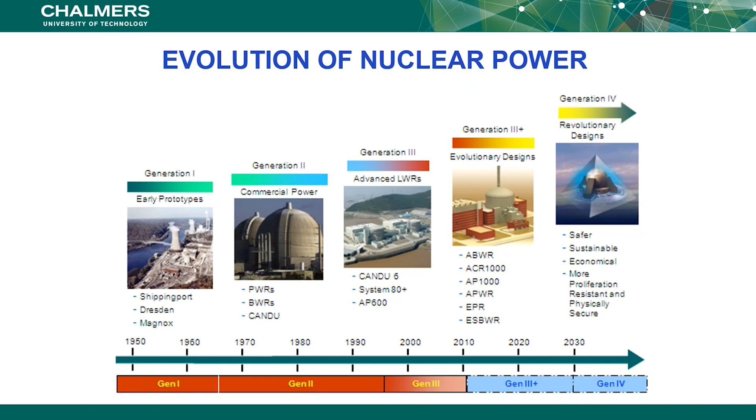With this being said, let's dive a little bit further. Next slide, please. So what are the common designs which today we can say we have in the world?

Here you have a table, taken from a review paper. It shows not only what type of reactors we have, but what type of material, the fuel, which one it is, what is the moderator, what is the coolant. And of course, it's very interesting to know the cladding and some operating parameters.

So we can talk about gas-cooled reactors, pressurized water reactors, boiling water reactors, pressurized heavy water reactors, advanced gas-cooled reactors, and high power channel type reactors. The fuel is mostly uranium oxide, but we also have mixed oxide fuel, that means uranium oxide and plutonium oxide mixed, so-called MOX.

When we talk about the moderator material, you can see that it varies already today. We can have graphite, but also water, so-called light water, and heavy water when it comes to the pressurized heavy water reactors.

When it comes to the primary coolant material, that also can be different, but in some cases the moderator and the primary coolant material are the same thing. So I'm speaking mostly about the water-cooled reactors, which is basically one of the most used types of reactors in the world right now.

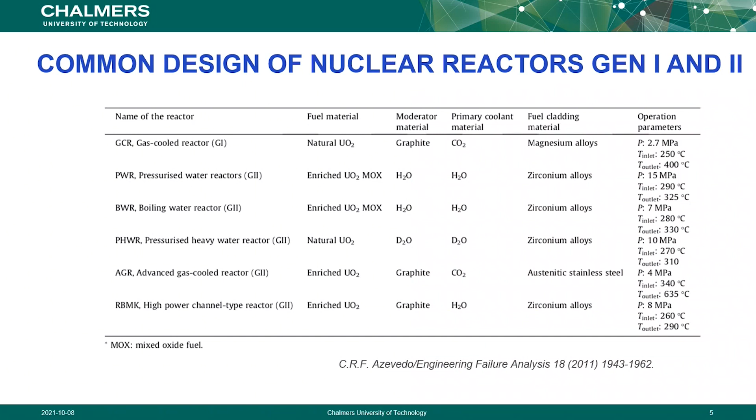So this is a very important real life case of why the materials used in the reactor are very important. And the design of the reactor is very good to know, because then thinking about what type of chemistry can happen, some materials, when they react with each other and have a proper environment to react, can play a very important role in safety.

Let's go to the next slide. Then when we are talking about the design for the Generation 4 systems, and also the 3+ systems, basically we are talking about different types of nuclear reactors. So we have the gas-cooled fast reactors, lead-cooled fast reactors, molten salt fast reactors, molten salt reactors, advanced high-temperature reactors.

You can see also that the spectrum is sometimes fast spectrum, other times thermal spectrum, so you have it in the next column there. Then we talk about sodium-cooled fast reactors, supercritical water-cooled reactors, and very high temperature gas reactors.

And then you see that the neutron spectrum differs very much, and this is basically because of the type of fuel you have in the reactor. So if you look a little at that, you see that the fuel will change. It's not only uranium oxide or MOX fuel, but there are other types of fuel.

This is because this type of fuel is already recycled, and is basically now probably at the 4th or 5th cycle in a reactor after their first use. The coolants also are changing. The reason is that having a fast reactor spectrum, you have to look at what you use in order not to thermalize the neutrons, not to stop their speed.

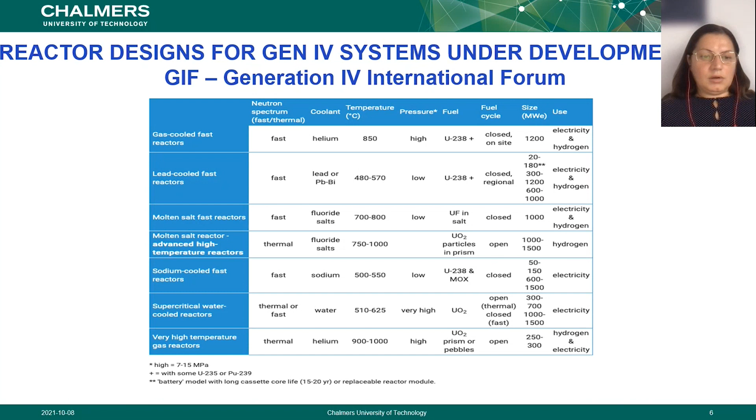Of course, there are much more reasons, and I don't have today this in mind to talk about. But anyway, keep in mind that all these reactors we have here, at least half of them are foreseen to be small modular reactors. So not all of them are fitting for that, but some of them are. And here I'm talking about mostly the salt cooled reactors or metallic cooled reactors.

So how about nuclear safety? What are the primers of the nuclear safety? Well, we talk about hazards. What hazards do we have? What are the most important? Fission products are highly radioactive, and some of them are also toxic by themselves. They don't have to be necessarily radioactive.

What is the aggravating factor when we talk about nuclear safety? Well, a nuclear fuel can never completely be shut down. So we have the decaying heat, we still have reactions which are ongoing, chemical reactions, but also due to the heat, you can have all kinds of different metallic phases which are still modifying.

And what are the objectives when we talk about nuclear safety? Of course, the objective is to prevent the release of radioactivity into the environment, and of course, interaction with human beings. So for this, there are two main safety pillars we can talk about. There are much more, of course, but these are the main safety pillars.

One is called defense in depth. That means there are multiple independent physical barriers. And which are these physical barriers? Well, first of all is the fuel, and the fuel pin, and the vessel of the reactor, and then we have the containment of the reactor. So all the components of a nuclear reactor are built with safety in mind. So they have to withstand by themselves stress.

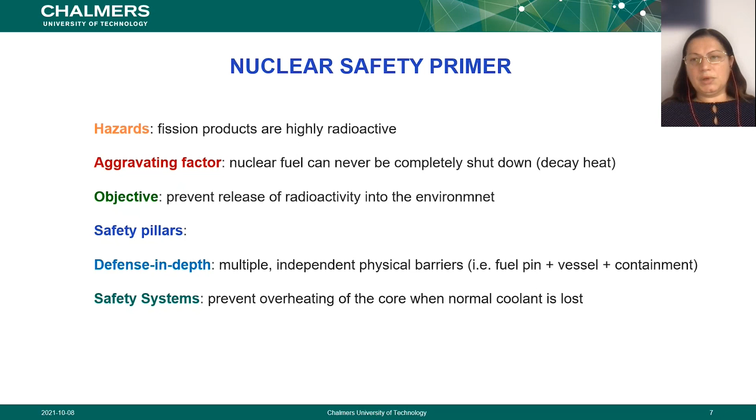This is a lesson learned from past happenings and also from tests which were made before the reactors were even built. Let's go to the next slide.

Thank you very much. So the physical barriers - as I said, it's a very childish picture, but probably quite easy to understand. We have the first physical barrier, which is the fuel. You can see the fuel pellets are stacked and encapsulated together, and you have the cladding material around them.

So basically here is the second barrier, and all these are stacked together and put in the fuel assembly, which is the third barrier. The fuel assembly is in the core, where here in the reactor you have this small red dot. It's put in the vessel, which protects everything. So this is another barrier.

And then you have the reactor containment. Here you have a better picture where you can see in 3D almost how the interior of a containment looks and where the core is placed. The core is here, the red part. So you can see how many systems you have around in order to prevent any escape of radionuclides which can possibly escape by mistake from the core of the reactor.

And then, of course, all around there are other systems which can act if the containment is still not damaged. All the other systems here are made with the thought that they should be independent and should not come in contact with anything inside. So we have these heat exchangers here - basically the systems in the reactor shouldn't come in contact with anything that goes into steam or to the turbine. So there are a lot of redundancy systems, and even these systems still have additional redundancy.

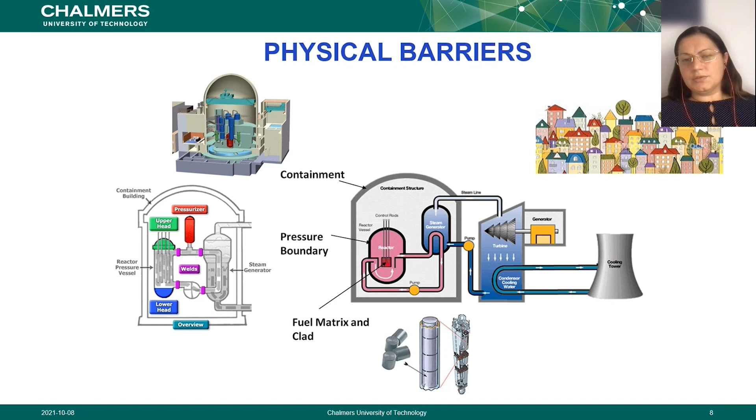Let's go please to the next slide. If you think a little bit about how things are handled today at nuclear power plants, and how safety applies all the way until the fuel can be taken down to the final repository - here I have the example of Sweden.

You can see that you have the fuel, the cladding and the fuel, the reactors here, several power plants where you have different types of reactors. For instance, in Oskarshamn you have boiling water reactors, while at Ringhals some of them are pressure water reactors, and here we have another boiling water reactor. So the type of reactor can vary.

What is happening with the fuel? Basically, after you use the fuel in one cycle or several cycles, you take it out and keep it in some pools which are very close here on the site. You have the pools where you can keep this fuel up to 3 years.

And then you have to transport the fuel to an interim space. In Sweden, the interim space is called Clab, and it looks like this. There are some swimming pools quite deep where you can store the used nuclear fuel in capsules. It will stay here up to 40 years until it's cooled down enough that you can actually put it in the capsule.

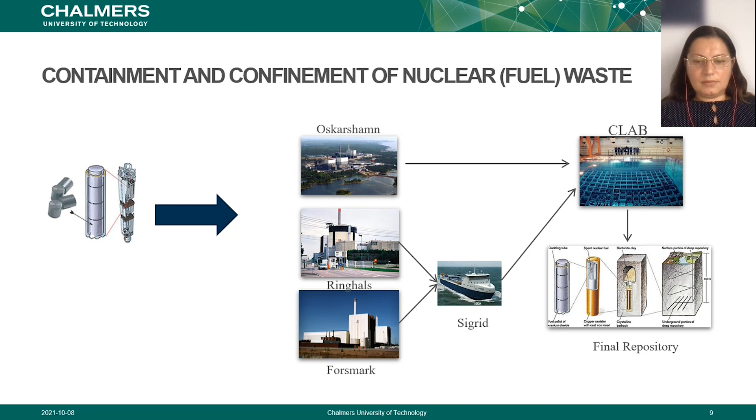So now we are going to talk a little bit more about the fuel matrix and the cladding, because this is a very important part of the safety. As I said, this safety goes from the beginning to the end, and it's depending on the materials which are present in the fuel matrix and also the cladding.

Why do I say matrix? Well, because you have different types of compositions and chemistries in a fuel, and you will see that it can be quite complicated chemistry, and also cladding can be quite different. So let's go and see the safety.

When we talk about nuclear fuels, there are quite many types of nuclear fuels we can talk about, and they can be either commercially available already, or they are under evaluation, some of them, or they're under research.

And the most used right now in the world are oxides, and you can see that you have the uranium oxide or MOX fuel. Then we have the metallic fuels, which were used in the Magnox reactors a while ago. Carbides, which are still under evaluation and research right now.

We have nitrides, where also, actually in my group, we are making quite a bit of research on the nitrides right now. So it's one of the fuels which is already under evaluation, one step further from the research area. Then we have the metal alloys. We have the inert matrix fuels, and these inert matrix fuels are basically in the ceramic forms.

And then we have a plethora of other types of nuclear fuels which are under research, and some of them are quite advanced. If you look at this TRISO, for example, which is basically tristructural isotopic fuel, it looks a little bit like a beautiful golf ball. This is actually quite advanced. It's one of the most promising nuclear fuels because it's extremely good when it comes to safety.

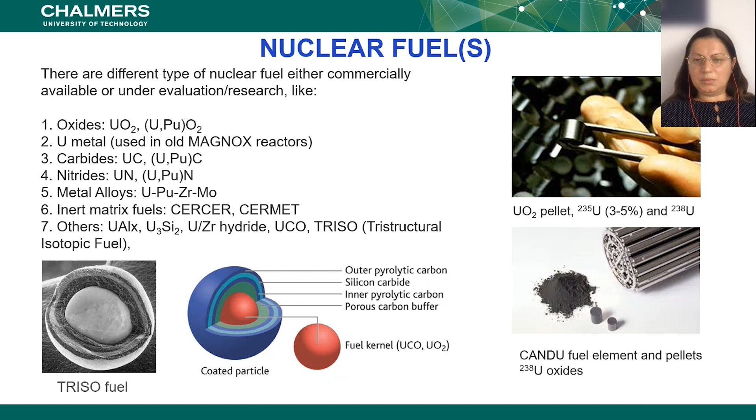Before that, we are going to look a little bit at the cladding materials. And as I told you before, cladding materials are very important for safety. And this is why: first of all, it's because of the materials they are made. They can serve as protecting the fuel, but they can also, in proper environment, play the role of a catalyst. You know very well that catalysts can speed up reactions, and then you can have chemical reactions which are not necessarily desired in a nuclear reactor, which can lead to severe accidents in the end.

So we have the well-known zircaloy, and you have it, it's this quite shiny, beautiful color. Then we have stainless steels, depending on what type of reactor you are using. But here we can look at the Kanthal type of FeCrAl material.

And then we have all kinds of aluminum alloys for research and test reactors. We have all kinds of refractory alloys, which are withstanding very high temperatures. So these are mostly used for gas type of reactors, which have much higher temperatures for functioning than other reactors.

And then we have also some research for the ceramic matrix composites. There are quite many, but none of them is right now desired for operation. But this has been also a very good proposal, because when you have different layers of composites, they might withstand pressure and all kind of deformation maybe better than a metal.

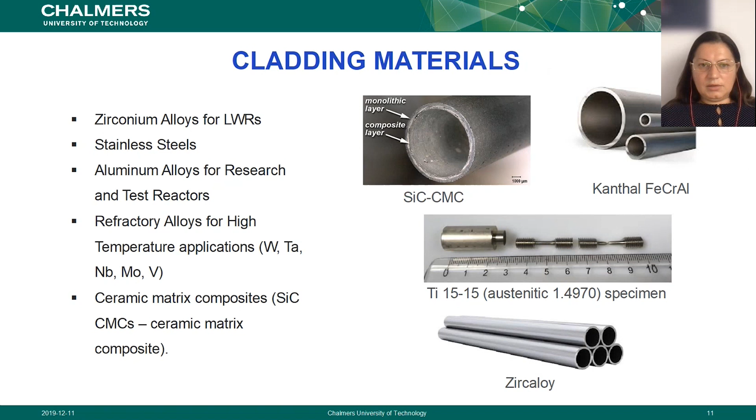When we talk about the coolants, here we have also a very important part, because a coolant can play a very significant role as the barrier, which is almost the ultimate barrier before everything goes out from the containment of a nuclear reactor. So they have to both cool, and most of them also have the role of retaining some of the fission products which are produced in the nuclear fuel.

Historically, we have very interesting coolants, and you can see that there have been a lot of liquid metals which have been used, and we have had mercury, sodium, potassium, lithium, and so forth. And then today we are looking very much at lead and lead bismuth eutectic as being the most inert of the group.

If you think about lithium and what can happen with it, and you have seen a lithium fire, then you understand how safety can be there or not. The same is with sodium. But sodium is actually a well-proven technology, which we know has been working quite well. But today, there's a lot of emphasis put on lead and lead bismuth type of coolants.

Of course, we have the molten salts, which is also a very important type of coolant, and today it's also one of the interesting coolants which we have.

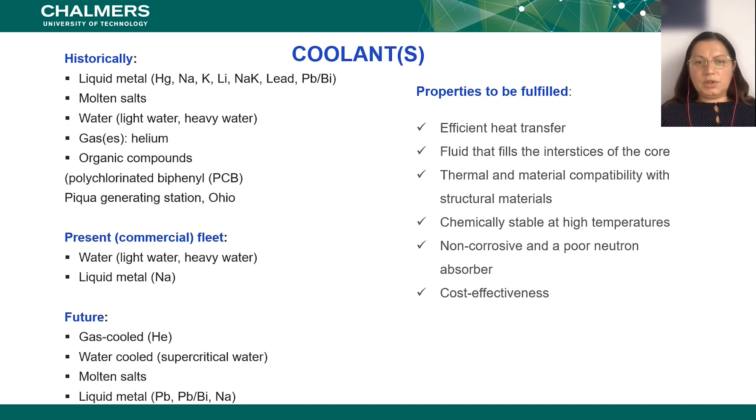Here are examples of some of the reactors I've been talking about. The first little experimental nuclear reactor, the EBR2, was cooled with sodium. It was in the desert close to Idaho Falls in the US, and this was the first time a reactor was connected to a grid, powering three or four lamps. That was the beginning of the era when we started to have commercial reactors.

Then you have some of the advanced gas reactors, like the Torness Power Station in Scotland, pictured here. You also have this very interesting reactor cooled with organic coolant, the Piqua generation station.

And here we have the picture of the first fast reactor, which we now call generation 4. It wasn't really a generation 4 reactor, but many of you have heard about it - Clementine. The Clementine reactor was cooled with mercury, worked with plutonium-239 fuel, and was in operation between 1945 and 1954.

It was a very little reactor, and you can see the control room wasn't so impressive, so it could actually be operated by not so many people. But it's been one of the milestones reached when it comes to reactor safety and reactor design. That's why there are a lot of lessons learned from the past - many of the research reactors we've had in the past, we now call generation 4, and we've made a lot of improvements since then.

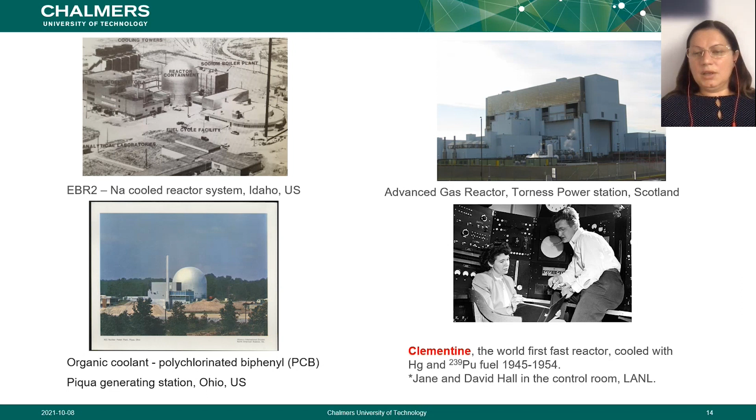Now that we've talked about the fuel, the cladding, and the coolant, let's look at the designs of the fuel assembly and the cladding. Depending on the type of reactor, you can have different geometries of the assemblies put into the reactor. These geometries provide support and protection for the fuel pin bundle and other components, provide the controlled path for the primary coolant so it can flow through all these channels, and provide a compact structural unit that can be easily moved in and out from the core.

Why is that important? Of course, it's important for refueling of a nuclear reactor. And these have to interact with neighboring subassemblies in a way that ensures safe and predictable reactor geometry, because the calculations for the core's proper functioning depend on that. If you know the exact geometry of the core, you can determine ahead possible happenings and behaviors you can prevent.

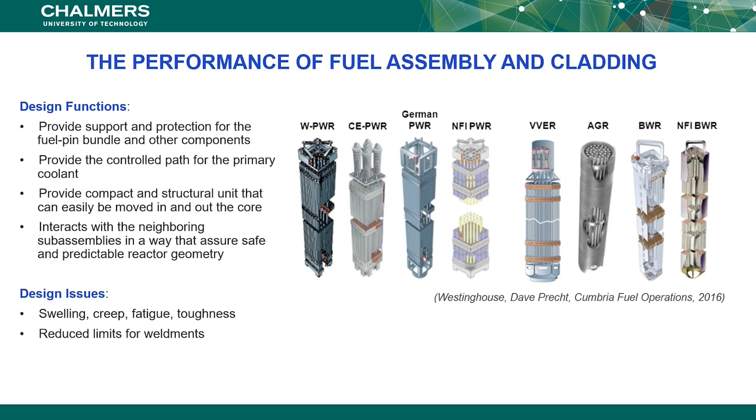There are, however, issues we continuously try to improve. We have swelling, which can happen in the material. We have creep. I'll explain a bit later what these terms mean. Fatigue and toughness. And one of paramount importance is the reduced limits of the weldment - when you weld something, that's basically a defect you introduce in the material knowingly. You know the material doesn't have the same structure anymore because it's a weld, and you know this exists, how many you have, and where they are. These are the design issues we know about.

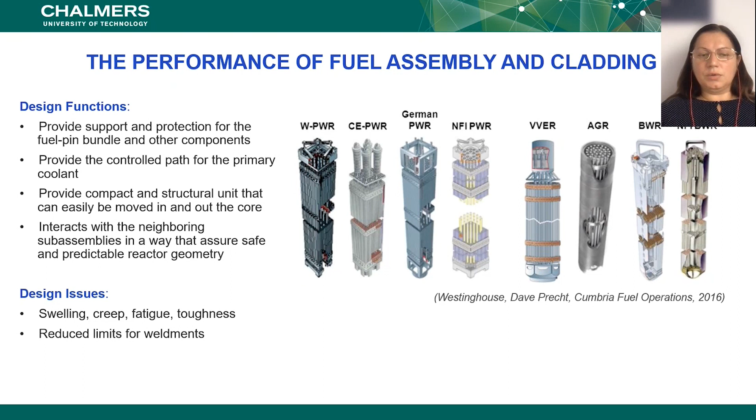I'm sorry, I have somebody which wants to come in here.

So this is basically already a lot of the safety features which are inside the fuel rod by design. So you already prevent some things which will happen due to irradiation when you start producing, this is, by the way, a fuel rod which is made for oxide fuels. And in their case, we can talk about significant release of gases, and also we have the volatile products which are released, which will end up in gas form. So that means this plenum will fill gradually with different compounds and gases resulting from the irradiation.

So knowing this, how the fuel rod looks like, then you already have a very good case where you can prevent and know the future behavior. So this is the safety of the fuel pin, we call it. And of course, this together with the rest of the reactor is going to be, in a way, easy to prevent and calculate certain events, unless it's a sudden thing which you cannot prevent at all, like a natural disaster. Next, please.

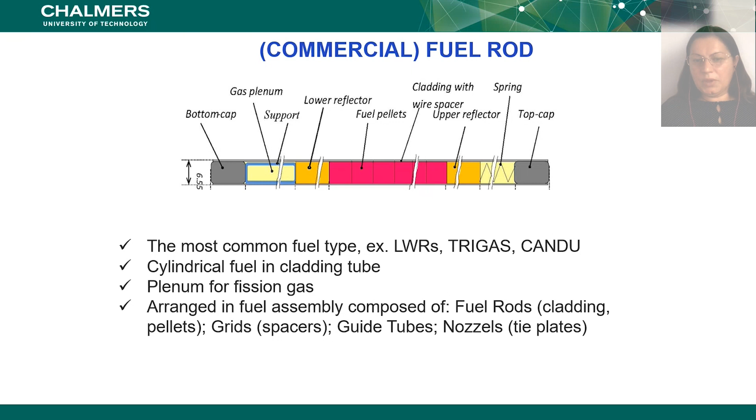When you think about the performance of the fuel assembly and cladding, we were talking a little bit about what they need to withstand, and the cladding has to survive, and it has to be very predictable. So wastage we were talking about is basically the corrosion by the coolant - the fuel cladding chemical interaction. Also, I told you that you have a lot of interaction, it's material chemistry basically here. And then you have also the mechanical part, the mechanical dimension, where you have the mechanical interaction, the fretting.

Fretting is basically when the coolant goes by the walls of the material, and then you have potential damages which can happen during that time.

Then we have strain. What is the strain? It's the fission gas pressurization. As I showed you before, you can have gas release due to the fuel irradiation.

Then you have the swelling and associated creep of the constrained components. So, of course, if it's too much overpressure and you also have this heated surface of the fuel, then you have a material which is a bit more elastic and easier to modify. And then you will get a bit of swelling. Of course, if you have some defects which are coming from the design, or they're simply coming from the production most of the time, then the swelling can find such a spot, and then you can form a little bubble, basically.

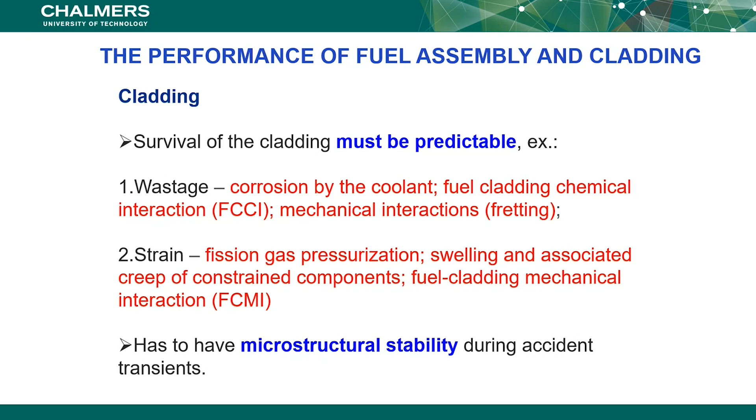So when something happens, what can happen? Well, a lot can happen, but when you take it down to the fuel during operation, you can have a sudden tightness loss of the cladding. So as I said, you have potential defects, or you can have stress-related damages. And this will lead, well, here it says that will lead the coolant to enter the pin, but first you will have a very small pore.

And that pore will probably make it easy for the coolant to try to enter the pin. And the result can be a possible fuel coolant interaction. So the coolant will come from the outside and interact with the fuel inside.

Now, depending on the operation condition, the products of the reactions, when you have the small pore, they can increase in size, and basically they are growing like a crystal. It's not really exactly a real crystal, but this is just to emphasize how it can happen.

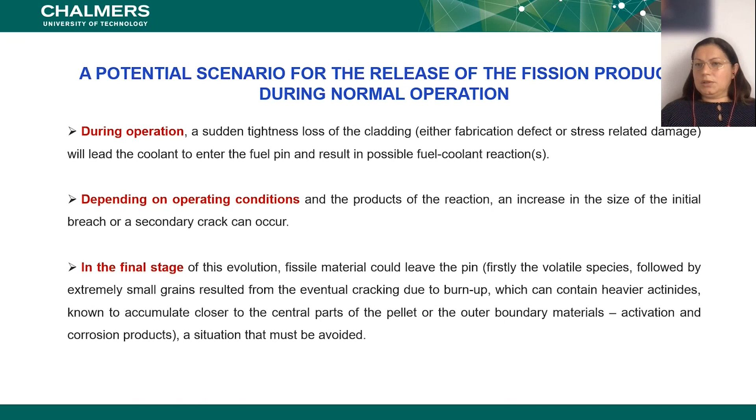And this can increase the size of the initial breach to a secondary crack, so you can really have a crack in the material. And then in the final stage of the evolution, the fissile material can leave the pin. What is leaving first and how depends a little bit on the type of damage.

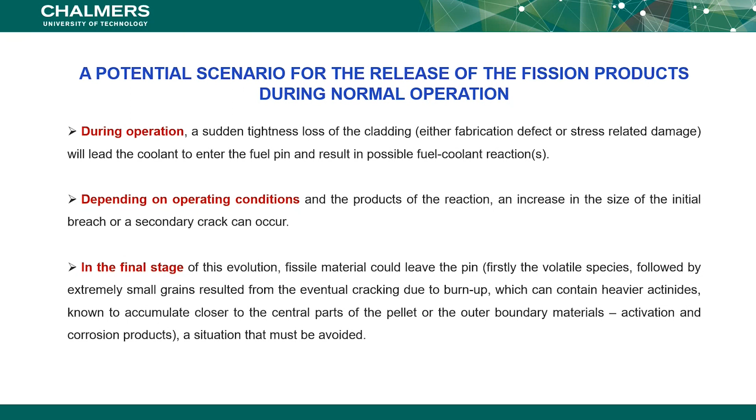But of course, if it's a small damage, then you have these kinds of steps. The volatile species go first, followed by extremely small grains resulting from the cracking of the fuel because of the burnup. This can also contain heavier actinides if the material comes from the center part of the fuel. Then basically you can have a release of the material into the coolant. Of course, this situation must be avoided at any price, but it is happening.

Next, please. So if you look at the nuclear fuel, how it can look after a certain time in the reactor, you see that it's not a compact material anymore. It has a lot of damages, a lot of different phases forming, and you see the cladding is already in contact with the fuel.

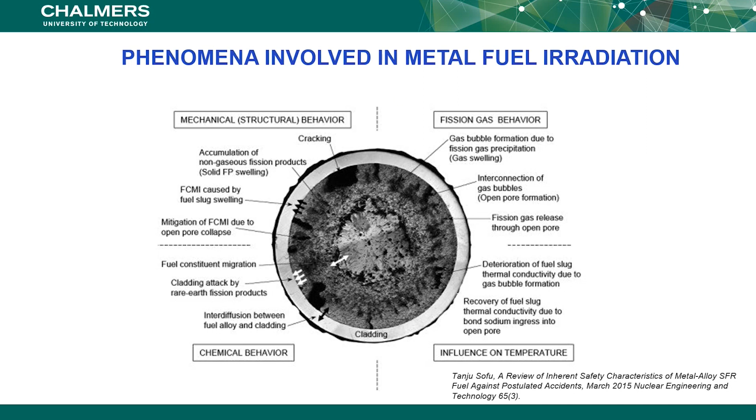So then you can think that a lot of chemistry is happening there as well. If you know this chemistry, depending on what type of coolant you have, you can realize what kind of reactions you will have with the coolant before it escapes from the containment and goes out into the atmosphere. So then you can predict and calculate the chemistries, and also whether something is going to be soluble in water afterwards, and if so, it can go down into the soil and so forth. And of course we have the fission gases, which from one pin is not much, but if you think about the whole core, then you have quite a bit.

And you have a lot of iodine released. Iodine is known to be one of the first elements that will affect a human being if it's released and if there is enough concentration of it in the air. So this is a very important part to be known and studied.

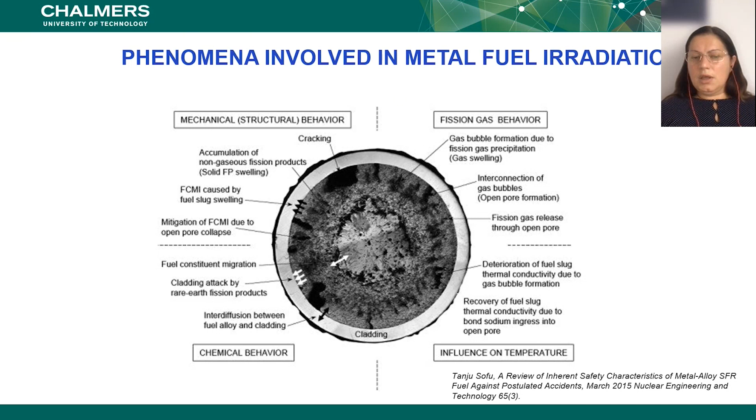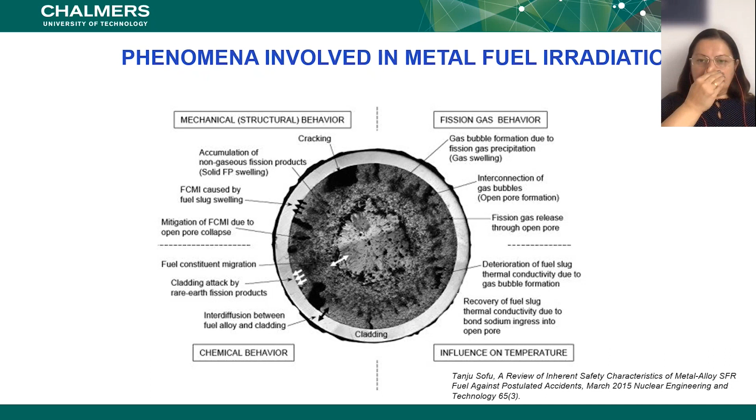So as you can see, this is a cut through a high burn-up fuel. This has been a metal alloy, so it's not an oxide alloy, by the way. I think we are going to the next page.

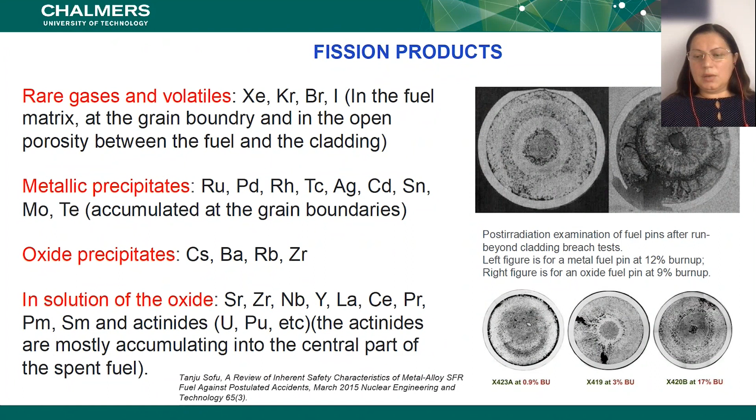So basically what we were talking about until now is this: in the beginning of life, we have a beautiful stack of pellets, everything is in order. Then you have the fuel a longer time in the reactor, and depending on the type of fuel, not all fuel swells that much, but oxide fuels swell quite a lot. After one cycle, this is an extreme case, but you can get a lot of swelling and deformation of the initial nuclear fuel. This can provoke rupture, and then you can see how the previous phases can be released into the coolant.

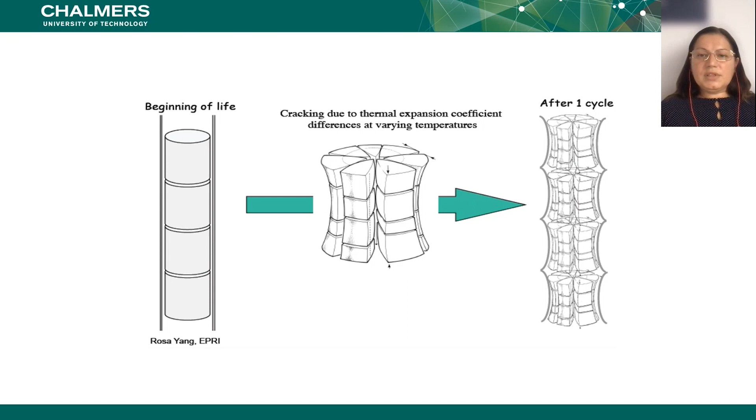So we are going next, please.

And when you have this type of swelling—I'm not sure these are the best pictures, but I took them myself, so I apologize for my skills—you can see that the swelling can look like that. What happens is it's not only swelling, but it disturbs the neighbors, meaning you get conditions to damage other cladding tubes around it. So from your nice stack of tubes, you can actually get a lot of damage, and here you see that due to the pressure, it already exploded.

So the bubble here was probably either a defect, or there was a difference in temperature because something was stuck on it from the outside, and then you have another temperature inside the tube. So you can see how the accident development can happen.

From the swelling, you get the release of the fuel. And if you look at the size of these holes, you can imagine that almost a full pellet can be ejected from the cladding. Next, please.

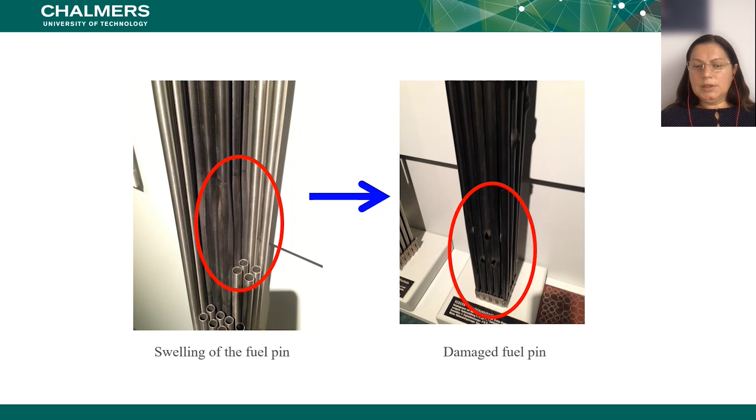So when you think about ejection of the cladding and all this, and we talked about volatiles coming out, here we have an example with only iodine. From the iodine, you can see how much chemistry can happen only because of radiolysis. This is in the case of water. You have radiolysis, you have interactions from control rods with silver or cadmium, and then you form different chemical compounds which may or may not dissolve in the water.

If they're not dissolving in the water, you see the dissolution here, then you might have some precipitates. You can have precipitation, adsorption and desorption, so this can go back and forth. There's a lot of chemistry—a lot of reactions which will eventually reach equilibrium, but until they reach equilibrium, they can form different phases, generating all kinds of phases which shouldn't be in the water of a reactor.

So all these phases formed here—if the reactor is damaged in a way that vapors can come out, all this chemistry will come out with it. And here we are only talking about iodine chemistry. Of course, there are other materials which are not as reactive, more inert than iodine, but some of them actually have even more complicated chemistry.

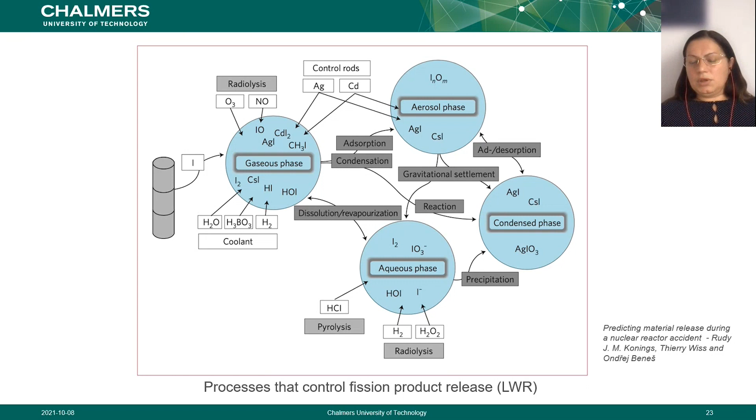So if you think about this, all this chemistry could be predicted because we know how iodine can react at certain temperatures and conditions, and what materials are close to it which could provide other materials that can interact and react to form another phase. So thinking about reactor safety, it's a lot of lessons learned from the past and a lot of developments in chemistry and reaction chemistry, which we've achieved to the level that today we can predict this kind of behavior. Next, please.

Also, when we think about fuel coolant interaction, and I told you that this is very interesting, the chemistry has been studied quite a bit, and a lot of aspects are known. We have, of course, different types of chemistry compared to what type of coolant we have. And the current studies for the generation 4 reactors we are studying today is the lead and LBE, these metallic coolants.

So what can we say about that? Well, the metallic coolants do have some clear disadvantages. Any impurity which enters the flow of the melted material can possibly be a seed, like a seeding point for crystalline growth. So basically you are growing crystals on the surface, and if you do that, we know that can block channels, and then if the channels are blocked, the coolant flow is not working properly. That means that we have areas where the temperature is going to be very high, and then we have the swelling, and then we have the potential holes they will produce, as you have seen earlier.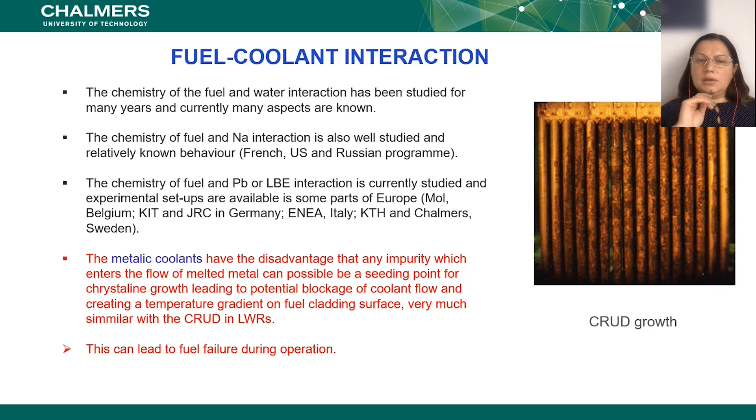So I was talking about the MYRRHA reactor. It's a reactor, a research reactor which is projected and on the way to be built in Belgium at the SCK-CEN area in Mol. It is a multi-purpose research reactor. It's very beautiful. You can read a bit more about that later.

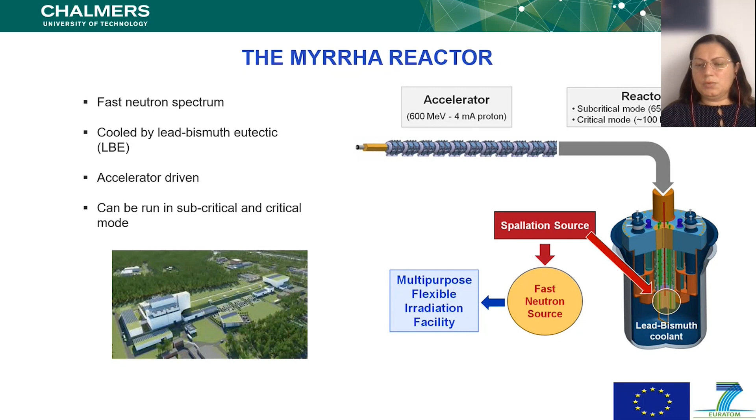But basically what we are looking at, and what we have a lot of research going on, is the lead bismuth coolant and the interaction with the fuel. One of the projects we have been looking at is called SEARCH, Safe Exploitation Related Chemistry for reactors which are cooled with metals.

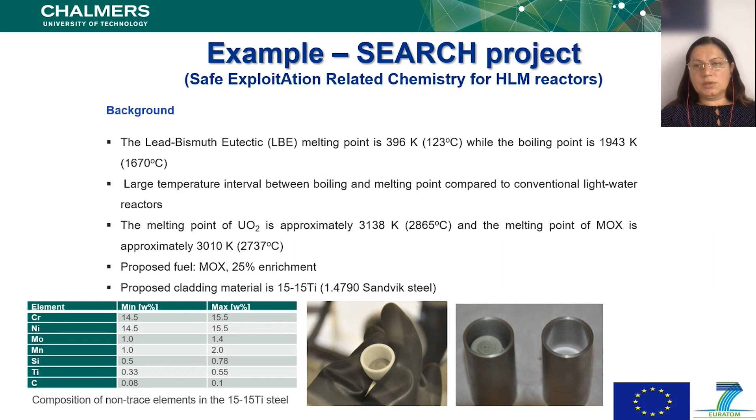And some examples of what we look at: we can look at the lead bismuth, which has an eutectic point of 123 degrees, and it's quite good because the boiling point is very high. That means that you have a very good coolant for the reactor. And then you have the possibility to have different types of fuel which can be used there. And then we looked at the interactions between the fuel, the coolant, and the cladding. And the proposed material is the one I told you before, the titanium 1515, so it's not a zircaloy anymore in this case.

And what basically we have looked at is what happens with the volatiles, the ones which come out first from the reactor, from the fuel when something has happened. So we looked at iodine, cesium, ruthenium, and then we have the reference, which is basically the samples we need to compare with. And then we look at different temperatures, what is happening and what we could collect from the surface. You see that the colors are varying quite a bit because we have had different materials forming.

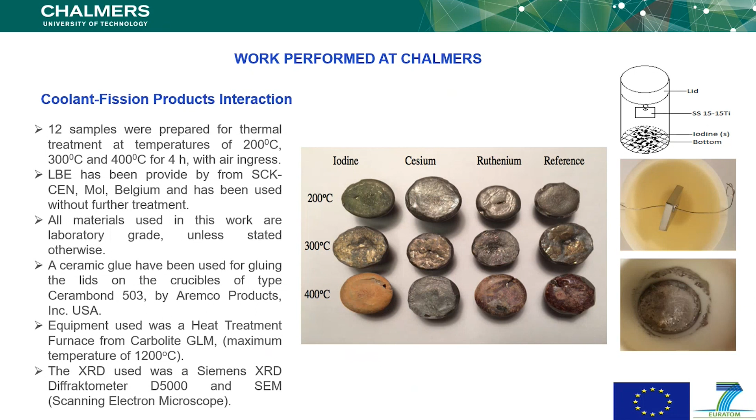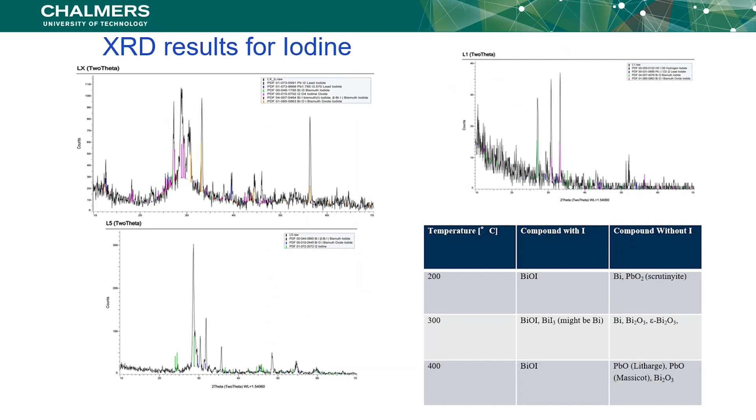So if we now go to the next one, we could collect the samples and we analyzed them with XRD for the results for iodine, and we found out that we have a lot of compounds forming depending on the temperature, which is also very good to know. So when you make a calculation for safety reasons, you have to know what phases are forming at different temperatures and also different compounds.

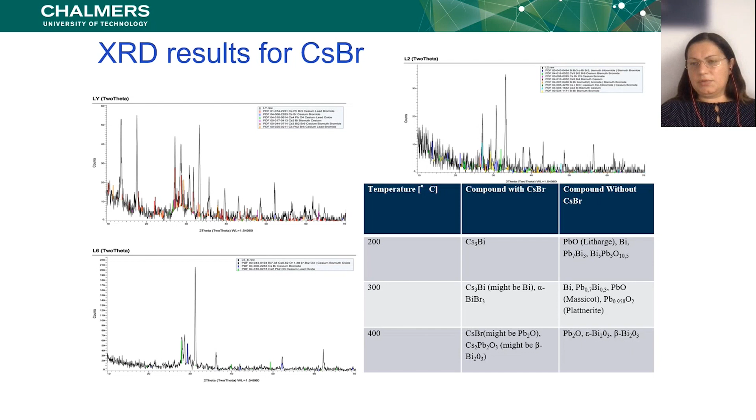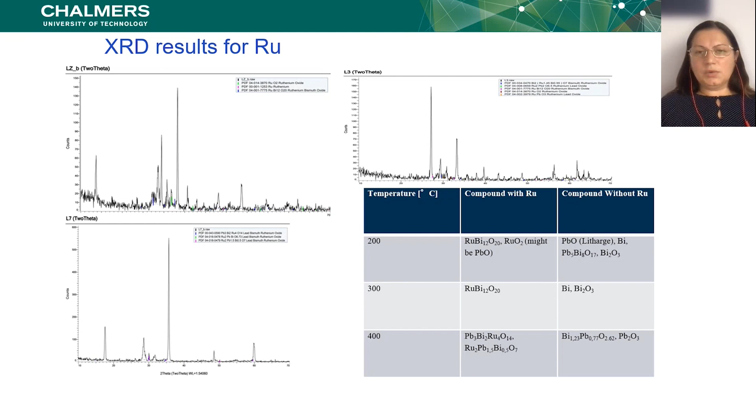And ruthenium also is forming quite a bit of compounds, some of which can be soluble in water, while others will be quite inert. When you find out that something is inert, that means not all these compounds will damage or be dangerous when they come out in nature, and probably won't react with anything. That means they cannot be transported further so easily.

So to wrap up, basically everything we said so far about safety of a reactor is that chemistry and chemical approach are a very important part of the operation of a nuclear reactor. We have had a lot of lessons learned along the years, from the beginning, from the Oklo reactor, where we could see what compounds have moved and how long they have moved in nature. We also know by now that the right chemistry combination of the fuel, cladding, coolant, and surrounding material is the base of safe operation of the reactor.

And why I say that is that you remember I told you that when you have certain materials which can be a catalyst, you might not want this happening, because then you can have other damages happening. The mechanism behind all the chemical processes happening during normal operation, including structural material, they have to be well known, so you know the mitigation measure you can take in good time.

And then you also know that when you know all these details, the further processing of the resulting waste is easy and depends basically on the results of both the initial chemistry and the final chemistry you have when you get the fuel out from the reactor.